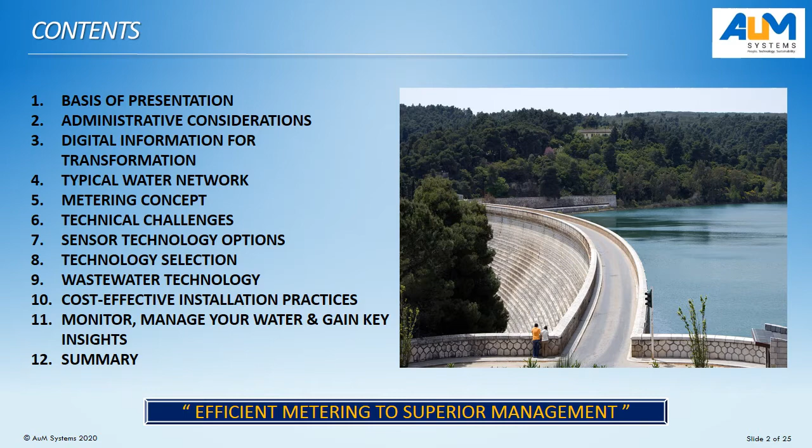We hope to give some key insights into not only the metering instruments but also the computerized management practices in this regard. Then we will wrap it up in the end. Let's begin with the thought that efficient metering will certainly lead to superior management of the water network.

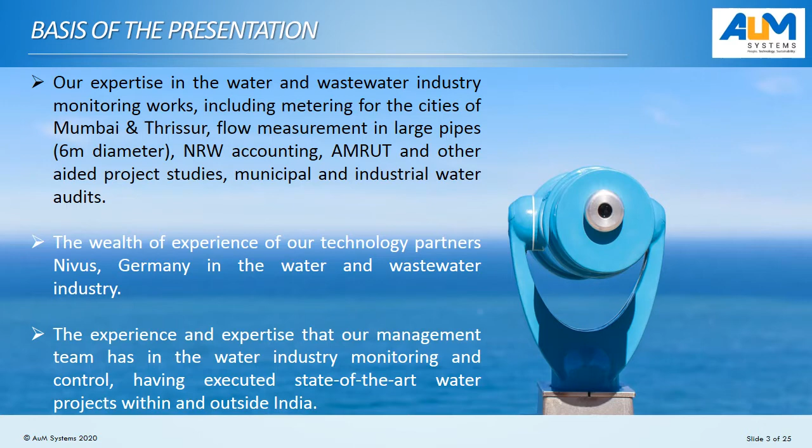We also have our technology partner Nivus from Germany, who bring more than half a century of manufacturing instruments for the water industry and implementing projects. And of course our own team, with many decades of experience inside and outside India, executing water management and monitoring projects, SCADA solutions, etc. With this wealth of experience, we are reviewing the monitoring, management, and NRW reduction needs in our country in general, specifically in Chennai. Let's see what we need to take care of.

In our country, generally we find that nearly half of the water is lost, and we call it non-revenue water. That is generally not very sustainable for any water network. Municipal water systems are working very hard, like Chennai in this case, to find solutions on how to get more efficient and how to record asset data efficiently.

For example, pipes were laid perhaps 70 to 100 years back in many cases. Chennai might well be more than a 100-year-old network. Now, the information about the assets, the below ground pipelines or the above ground assets, would be lost with time as people change. This needs to be recouped.

That is possible with GPR, ground penetrating radar studies, and geographical information systems for above ground systems. With that, you can bring all the asset data into an electronic platform from where the information can remain independent of the associated people. We think that's a very important step towards improving efficiency in our water system.

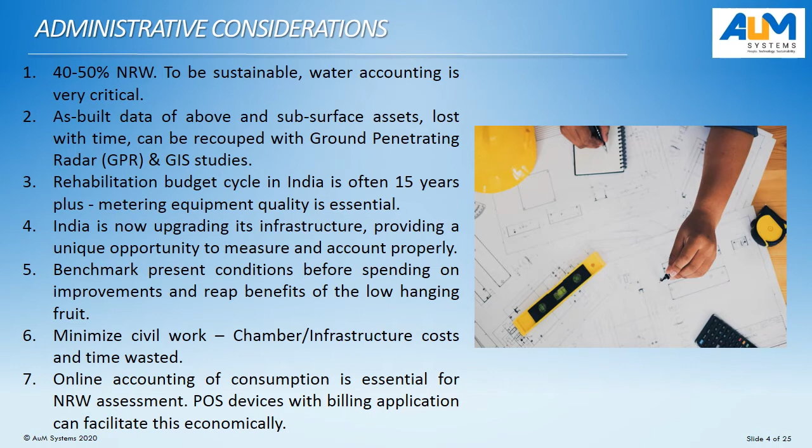Now, digital transformation. As we said earlier, we believe that it is important for you to know where your assets are. Where is the water flowing exactly below your roads or within your city? Where is the record of this information? Now, a GPR study with a ground penetrating radar will help you to determine where the pipes are, nearly all the way to your consumer connection.

It can locate where your below ground assets are, and then a GIS study can bring you all the above ground assets very, very accurately. So your metering and distribution to the consumer, any overhead tanks and other infrastructure that you have, everything can be recorded digitally and accurately. And once that is recorded, this can all be saved as AutoCAD files, for example, DWG files.

And with modern systems, with open protocols, it is very possible that if you are using a SCADA system for visualization, then this entire water network data that comes from the metering can be directly absorbed into the SCADA domain. And that means that the information is not only stored digitally and permanently, but it is also available for the operator.

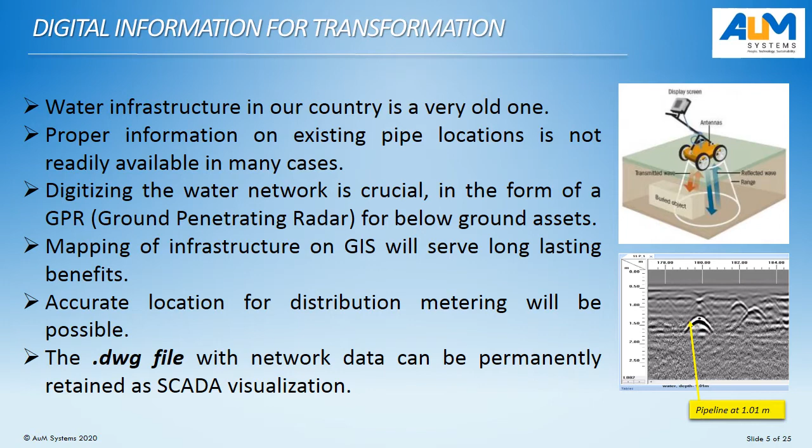If there is a broken pipe somewhere, he is able to see exactly where the problem is, and he is able to locate it before excavation itself. He knows where his pipe is and what he needs to do to repair. So this is modern management of the water network.

This is an example of what a GPR study can bring about, where you can have your network and the branches of the pipeline, including the consumer connections, visible. And then you can pinpoint your meters exactly. You can put the metering equipment where it matters. How to put the meters, we will come to in a bit.

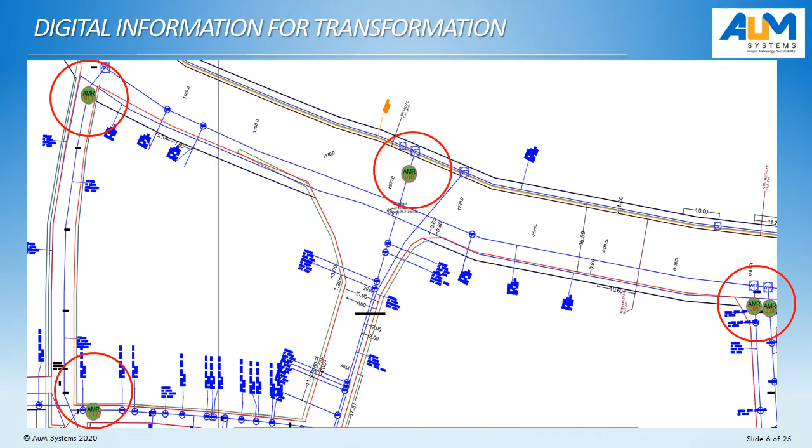But broadly, with a proper record of where your network is, your metering can be optimal and as required for the city, not random, based on available or not available information.

In a water network, we look at the intake system and then a treatment plant, and then there is the bulk transmission line, which takes water to the overhead tanks, or as the case may be, in a pumped system to a pumping station, which in turn feeds the bulk feeder lines, and ultimately the local distribution lines, which typically could be 75 mm or 100 mm dia local distribution lines.

The reason we are mentioning it here is that you could be carefully metering at each one of these points and then assessing your losses at each and every stage, from bulk transmission to the feeder lines across the overhead tanks, how much water you are losing. And then from the feeder lines into the local distribution system, from the metering in the local network against the bulk water metering, you can say, okay, what is my feeder line losses?

And then, of course, you can compare the distribution line data with the revenue water records that you generate from the housing individual consumer meters. So like this, you can localize your consumption patterns and your losses from the network and capture that information very accurately and take remedial action where you require it, where your priorities are. That's important for efficient water management.

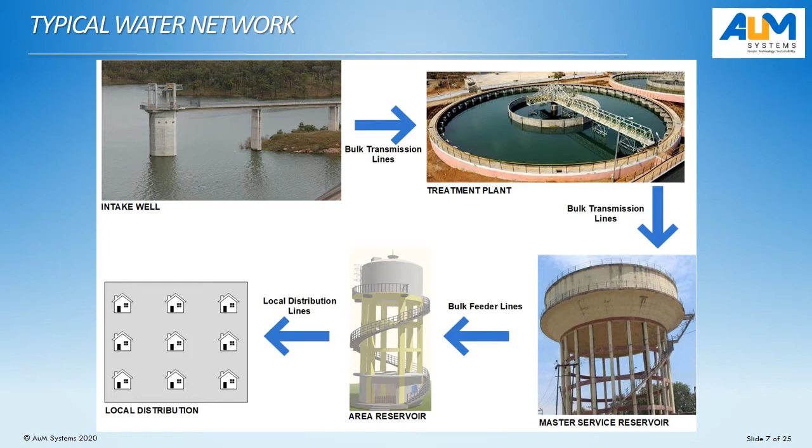Let's take a look at the concept then. Bulk water transmission lines. All the water that comes into the OHTs, all takeoffs and inlets, it's good to be metering them. How much water, what is the volumes of water we are taking in? And is there any deficiency in the supply lines? By looking at the velocity in the supply line, or sometimes there are blockages due to age in the supply line. These can be identified by metering in the bulk transmission line.

And then, of course, just downstream of the overhead tanks or pump stations, as the case may be, you have the feeder lines, which typically in a city could be 300, 400, 500, 700 dia lines within the city to specific areas. And by measuring in these, you can see how the water that is received in bulk is getting distributed to different parts of your city.

And this metering also, remember, it helps you to detect abnormal conditions, such as if there's a broken pipe and you have a higher flow velocity through the meter, that can be a warning that there is potentially a damage to the infrastructure in this area. So like this, your maintenance can become proactive.

Now, going from the bulk feeder line, you have the local distribution networks, which could be 100, maybe 150 dia, maybe 75 in some cases. Then you can have individual meters for each area, call it a DMA if you like, and that is how nowadays it's called a district metering area. We can use economical, cost-effective solutions for metering in these smaller line sizes and integrate all the data together.

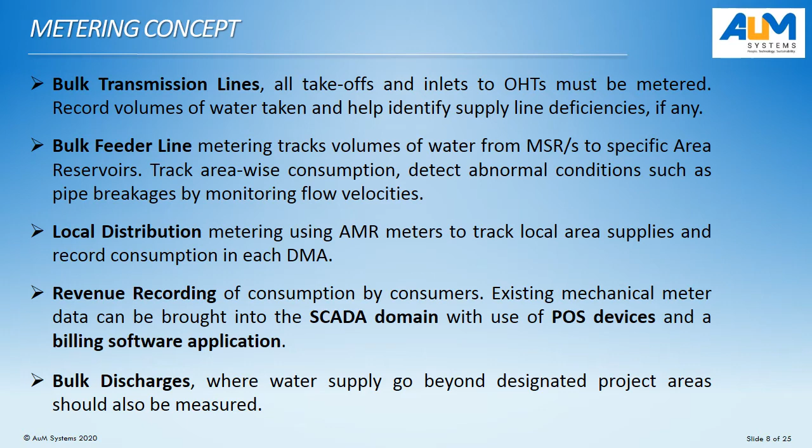Now, let's look at some of the technical issues. Earlier, we looked at some of the administrative challenges. Now, having done metering in different pipeline conditions in our country, different places, and in Tamil Nadu particularly, we've done 28 towns where we have actually metered the water consumption as a sub-consultant for the Tamil Nadu Water Investment Company, TWIC. And generally what we find is if you have to install inline meters, there is difficulty in isolating the pipeline. Where do you isolate? Where's the nearest isolation valve? Does it hold? How do you cut the pipe and install the meter?

Then, of course, there is no such thing as standardization in pipe material because the towns have expanded at their own pace. Chennai has grown at its own pace over the last century, perhaps. And then there are different pipe materials and different depths and different situations have come about in that.

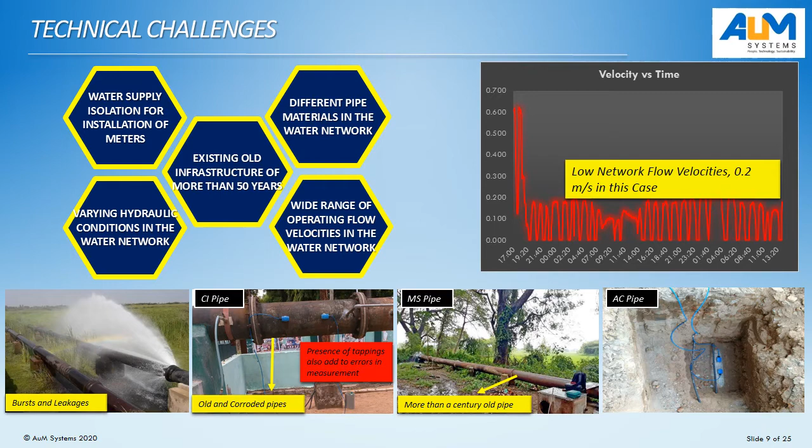Now, we are going to look a bit more closely at ultrasonic metering today, and we are going to look at examples of how we have used ultrasonic meters here. You can find that it is non-intrusive. We are not going into the pipeline at all when you use clamp-on technology, and it can be easily installed on the pipe and wired up all very, very rapidly.

And the sensors themselves can be buried. And that's an important advantage when it comes to clamp-on metering. And they give very good accuracy with ease of installation. And they are particularly relevant for smaller pipes, pipes which are 700, 800 or less diameter. This kind of clamp-on technology works like a dream.

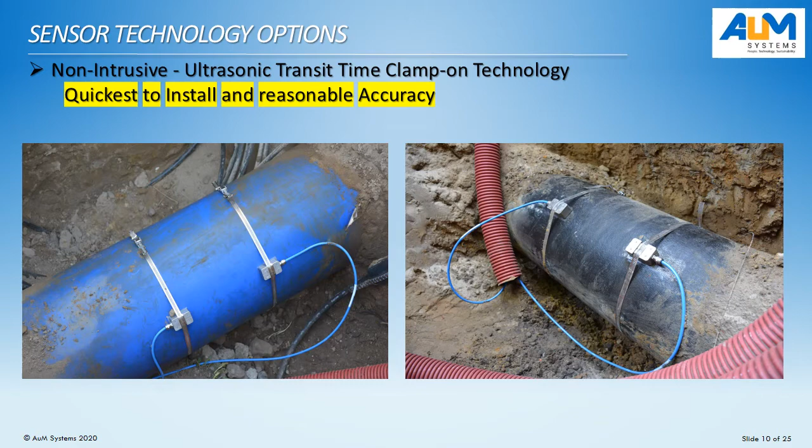An improvement from the clamp-on technology, and this is what we are doing in the city of Mumbai, is the insertion technology, where you can insert the sensor from the periphery of the pipe. Now the images are from a calibration exercise that we did on the meter, and you find that the tip of the sensor is protruding into the pipeline, and the sensors send data as pairs.

Now, what you are seeing here is 8 sensors, and they work in 4 pairs. And this is the configuration that we are doing for the city of Mumbai, as I said. And this gives excellent measurement accuracy, particularly in the bulk water system. And it gives the same accuracy at incredibly low velocities as well.

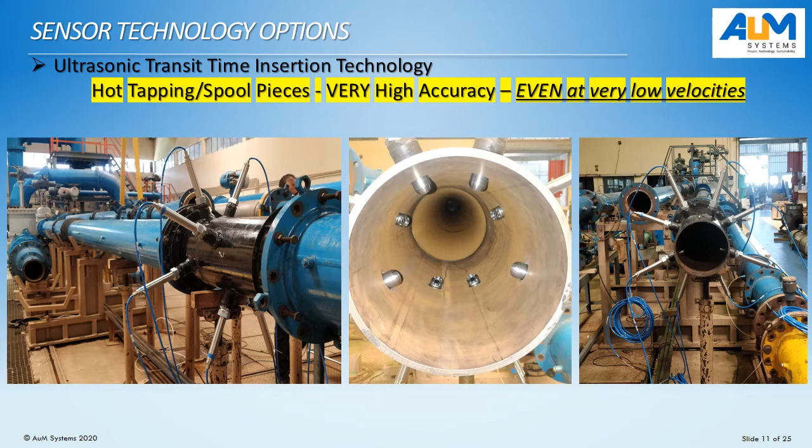So this is an excellent measurement methodology for the bulk water supply from the source and distribution, because you get to record the data very, very accurately in your water network, and throughout the year your consumptions can be tracked so very efficiently. Now, this is the insertion type flow meter, ultrasonic transit time technology. You can see an image of where we have done such an installation earlier. That's a project in Sri Lanka, actually.

And one interesting thing for us to point out, this is a calibration certificate for our 4-path ultrasonic flow meter from the Fluid Control Research Institute in Palakkad, a central government agency. And you see the accuracy levels that we are able to achieve. It's going down to 0.2 to 0.3%.

And we tried from 0.1 meter per second, 0.18 meter per second, all the way up to 5 meter per second flow velocity. And that's a very, very wide range. And we are able to maintain the performance accuracy throughout that measurement range. What it does then, it makes your water accounting very, very accurate. And that is what the city of Mumbai has picked.

We are very proud to be associated with the city of Mumbai. We are very happy that they've chosen, with the pulse of the country in mind, to go for very, very high accuracy and very robust, rugged, typically German technology meters for the project. And we are very happy that we'll be serving one of the prime cities in our country with accurate data on how much water the city is consuming and how much they might be losing.

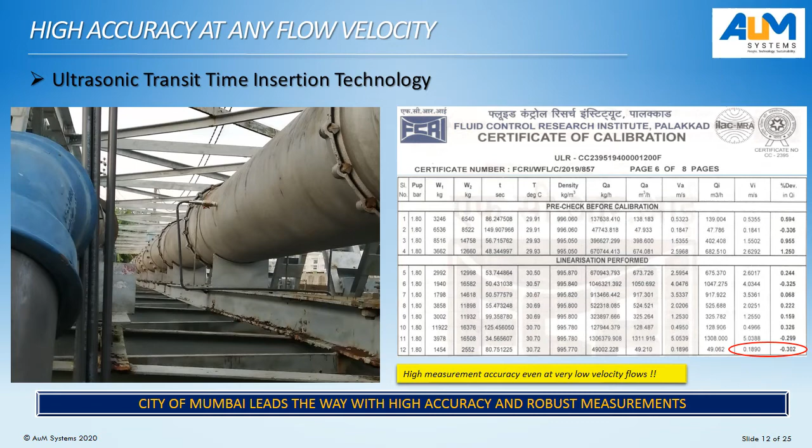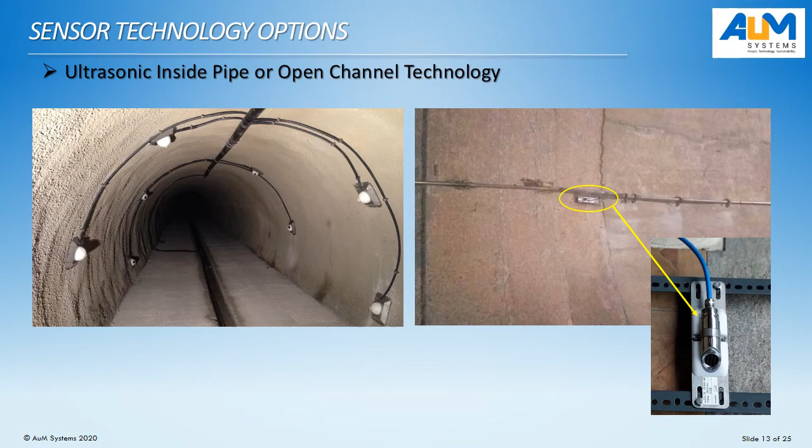Now, the sensor technology options nowadays are absolutely many. You can put sensors inside the pipe also. When you are taking water from the dam at the source, we've done measurements in pipelines up to 6 meters diameter in hydroelectric power stations in Gujarat. We got measurement in a pipe that is 6 meters diameter. The sensor itself sits inside the pipe and gives the data. And you see a close-up there of the type of sensor that is used for this kind of measurement.

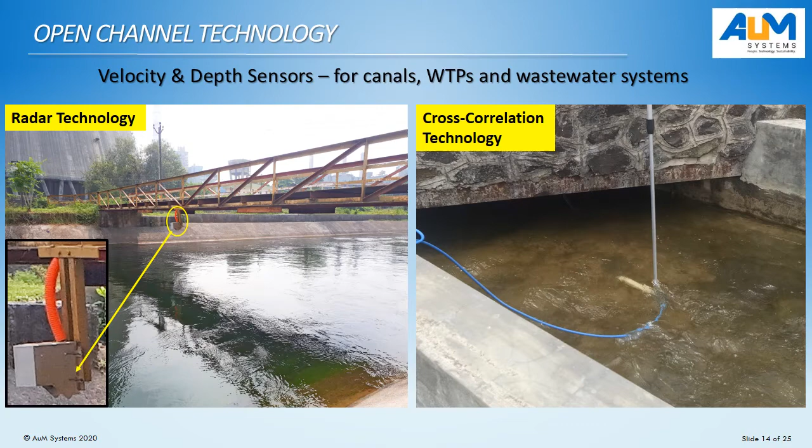And this can be used for water treatment plants, where you have open channels just downstream of the sand filtration units. And this can also be effectively deployed in the wastewater collection system. Of course, bearing in mind that wastewater as well is a precious resource now, because for many industrial purposes, etc., wastewater can be treated and reused, and that's a serious support for the stressed water systems in and around Chennai.

Now, here is a very interesting concept that we need to look at. In a normal metering project, first of all, you have to survey the site and see where you want to put the meters, then record your location. Then you go through a construction phase. And then in the end, you get the metering.

Now the world needs to be smarter. You cannot wait longer and longer to get the result. And year after year, you cannot be facing the same problems again and again, managing to keep the people with water. Nowadays, the metering can almost follow the survey directly with the clamp-on technology and all that is available, battery powered devices, etc. Lots of options are available regardless of your site condition, various different types of pipes, whatever it may be.

The smart approach is that the metering work, which normally would happen a year or so, 10 months into a project, can actually begin well within 2 to 3 months of commencement of a project. So you could be actually reading the metering data in the 8th month of a project, as opposed to waiting for another 5 months, 6 months for the data to be available.

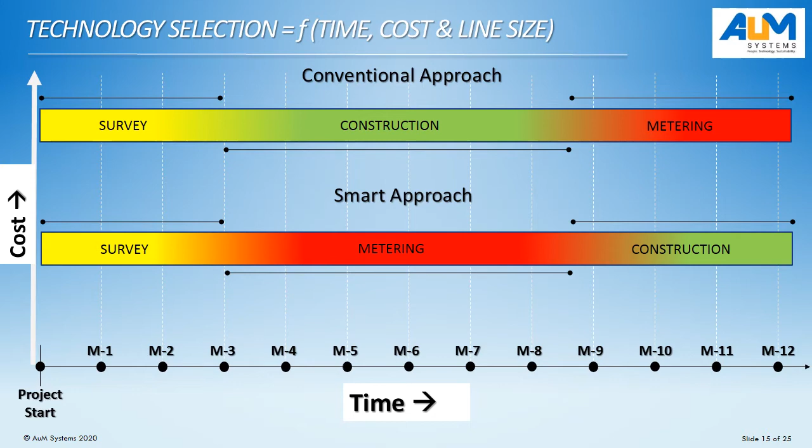And of course, metering cost: by selecting the right kind of technology that needs a lot less hardware, technology that's a lot smarter, you can see that the cost also would go down in the smart approach as opposed to the conventional approach. Of course, there is something that we are used to in half a century or more of measurement in water, and that needs to change. But any progress is possible only when we are willing to adopt technology and make that change and make our approach a lot smarter.

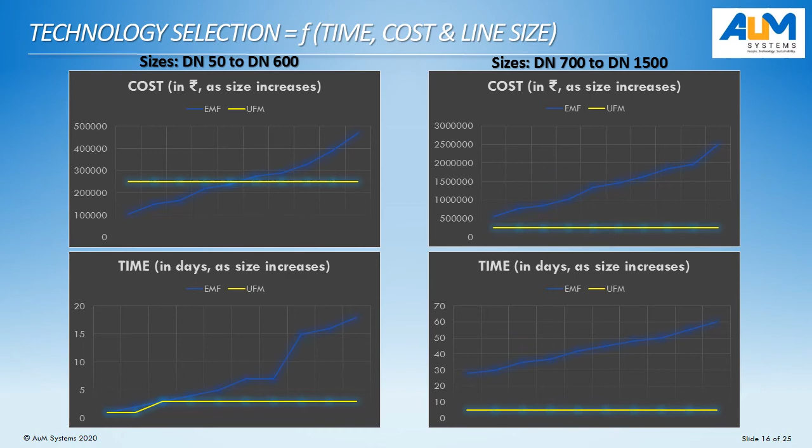A little bit of the wastewater technology as well, because this is something that Chennai has been grappling with over the years: how to quantify, treat, and improve our wastewater systems. Now, on the left-hand side, the image you see is that of an inserted meter in a pipeline in Perungudi, so close to Chennai, for Pallavaram Corporation. That's measuring the inlet flow to a wastewater treatment plant there. So what we want to show is you can measure in a very simple way in a pipe.

And what you will find, ladies and gentlemen, is that the data is quite shocking. The flows of wastewater often are totally underestimated based on the potable water supplies and things like that. What people perhaps discount is the availability of groundwater or alternative sources of water that are used and sent into the drainage, from cleaning, etc. So if you count per the number of people there, the record is not accurate.

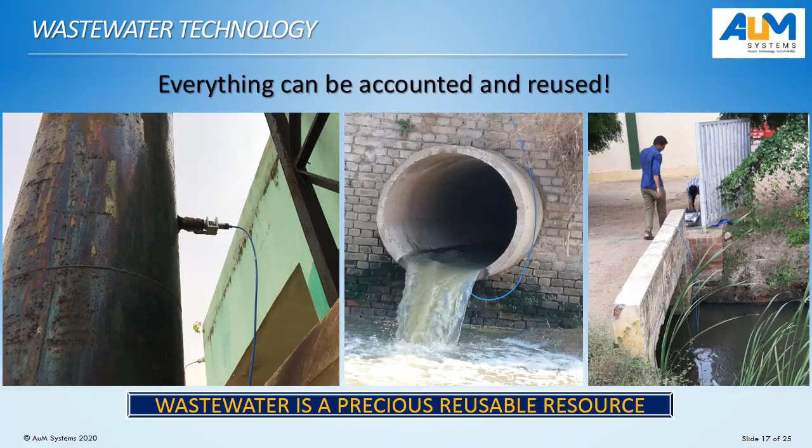Now we talked about the civil works, the construction of chambers, etc., in a metering system. And what we have observed in our market, in our country here, is that typically there is 15 to 20% of the metering cost. So if you have a 100 crore metering project, then perhaps 15 to 20 crore is going for civil works, chamber construction, etc. Particularly difficult and expensive and space intensive for large pipes. Complicated. Now you can have a clamp-on metering system.

This is a clamp-on metering system that we have installed, which can save 30 to 40% of your project time, because you can see the installation is very simple. You install the sensor and then close off with a conduit and fill it with foam, and then you can backfill the installation with sand, so that anytime in future, after a year or two maybe, if you want to open and calibrate the instrument for some reason, it's a matter of just removing the sand and gaining access. No need to construct chambers,

no need to offer these accommodations for the reptiles and so forth that are around the area. So this is something that we want to draw your very careful attention to. Please use it carefully and don't put a lot of money in construction of civil works; put it in metering where it matters. Thank you.

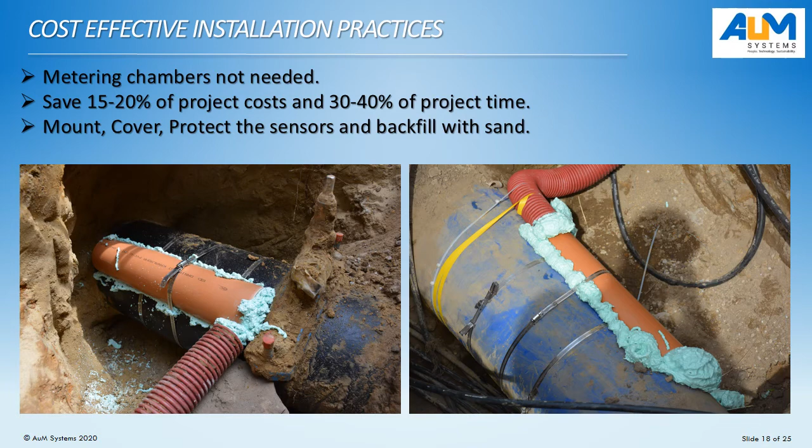Now here is a visualization of how we are inserting the sensors for the city of Mumbai, where the sensors are marked on the pipeline, and then we weld a nozzle and a ball valve there, and then pressure insert the sensor, hot tap it through the pipeline. So this whole metering happens quite amazingly without disrupting the flow at all. No one knows what is happening, just that the municipality has now started receiving the metering data.

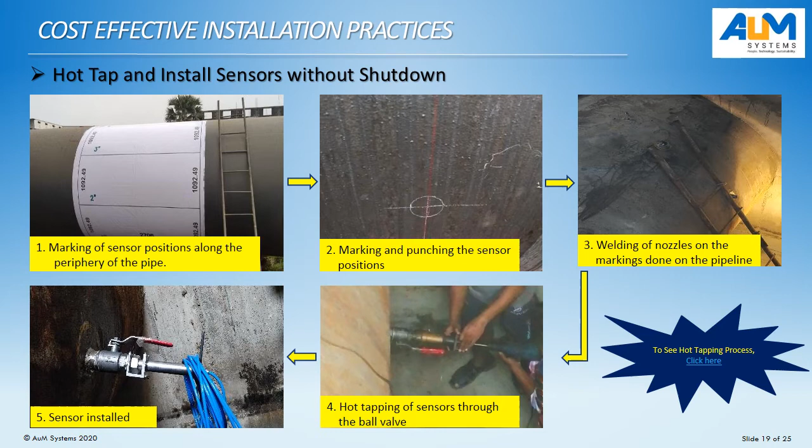So this is what is possible when you have to meter in your network without having to look for the shutdown isolation possibility. Am I supplying water to a hospital or something that cannot be isolated at all? So how to manage the metering? Water metering projects have been unsuccessful because of the inability to shut down the system. Now, there's no need to worry about it. In Mumbai, we are very happy that they are in the forefront and taking initiatives like this where they can measure very, very accurately, but without the trouble of shutting down.

See, this is how the sensor is pressure inserted into the pipeline. You see the image on the left hand side where by turning the handle slowly the sensor makes its way into the pipeline, and then when it reaches the end point the sensor is locked inside. You see on the right hand side there, the sensor is locked inside and the tool is removed. So the sensor stays in place until you have to remove it. So this is all happening with the pipeline continuing to be in operation.

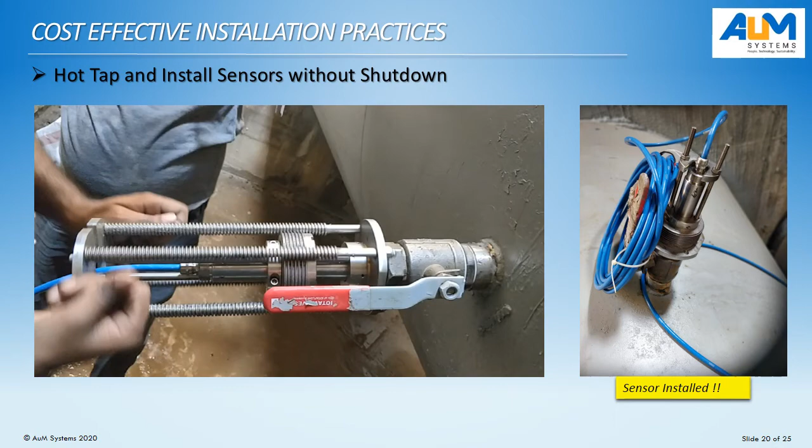Then we come a little bit into visualization and analysis of data, because metering gives a lot of data. What is important is to convert the data into useful information, to analytics. How do I analyze and interpret the metered data from the system? Now you see in the example above, there is a major pipeline which is going around a circle. So you see that horizontal pipe, and then each and every takeoff from the main source is metered. So you know how much water is going to each area.

And then from that, as small distribution pipes take off, they are metered as well with AMR meters. These are 100 dia generally, or thereabouts. They are all metered, and the record is sent to a SCADA system where you can analyze the data as you see down below in terms of trend. You can receive alarms on abnormal conditions: a pipeline has burst, or there is a communication failure, or an overhead tank is overflowing, or you can record the velocities in your system and make sure that the velocities indicate there are no blockages inside the pipeline. Very, very useful information for an experienced operator.

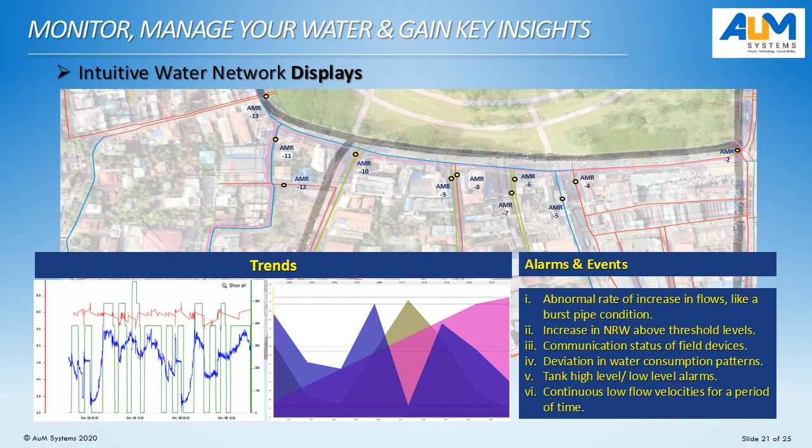Now, how to bring the data into information? You can have reports in the bulk transmission, daily, monthly, yearly consumption patterns, the distribution system, local distribution, periodic daily, monthly analysis, graphical presentation of this, comparison of previous week's data with current week, comparison of previous month's data with the current month, comparison of different areas of water consumption to the point of making it per capita consumption. How much is the per capita consumption in one DMA or a ward or whatever you call it?

What is the revenue water from the billing application with the POS device, as we looked at earlier, and we'll show some more details of that. You can obtain the revenue water from the software, and then that can be directly compared with how much water is distributed. If 10 liters are distributed and 5 liters have been converted into revenue, obviously the losses there are accounted to be 5 liters.

And then of course you also get information about outage. If a meter is not having any flow and there's no water going through, then that is suggestive of an outage. And these kind of analytics come into play. This is what we are providing in modern water management system.

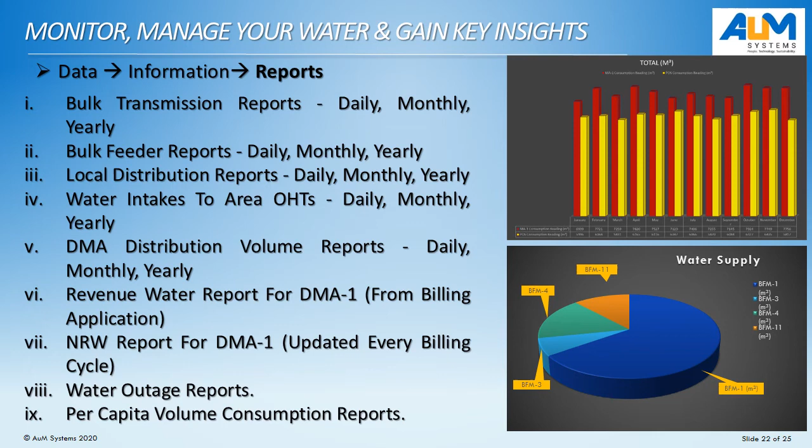Revenue tracking, this is by use of a billing software application. And you see on the right hand side a POS, point of sale device, which is taking data from each and every consumer manually. Somebody goes and reads the meter and enters the data by hand with the consumer number, and then this data gets stored in a billing application server, and then the system analyzes the data and gives you area wise quantification of the consumed water, whether the bills have been generated.

And you could go further and say how much of the bill has been converted into revenue as well, where the payment has been made. But anyhow, from a water management point of view, what is important is each and every consumer's consumption is analyzed, it is recorded, and it is presented to you as a quantification area wise.

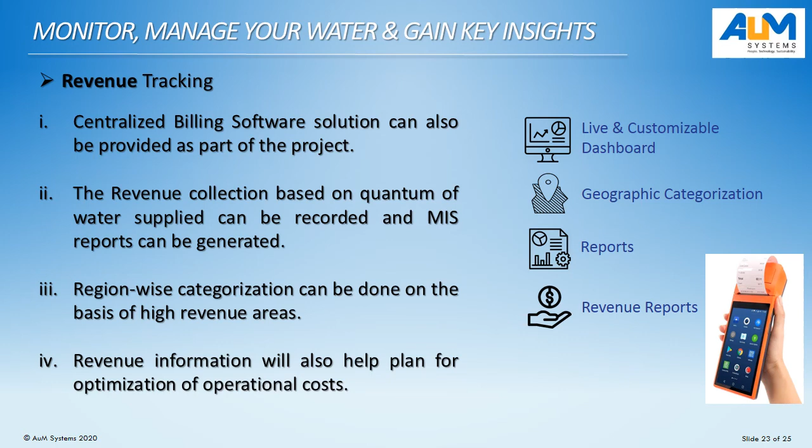So in summary, ladies and gentlemen, thanking you very much for your time. To conclude our discussion, what we are proposing for the city of Chennai, and indeed for every municipality, every city in our country which needs to go from water innocence to water excellence, what we are proposing is that not to depend only on one technology, but go for cost effective solutions.

Go for proven sensor technology. Don't just settle for options; there are many available in the market. Go for something that's well proven, that will last the lifetime that you are looking for, and do things in a scalable way, so that what you are practicing in one part of the city, for example the Chennai Smart City, what is being practiced there, it can scale up into much wider city-wide concepts later.

Now, the measurement solutions need to be perfectly optimized with information of the network data, and that considerably reduces the project cost and improves the payback period. Now, these are all based on water industry best practices, in terms of deployment of meters, as well as the technology SCADA solutions, completely web-based monitoring, where you don't need a control room nowadays.